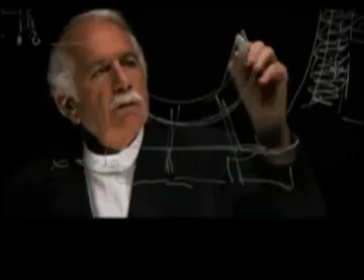We wanted to propose something new, something which does not exist today, neither in Singapore nor perhaps in the world.

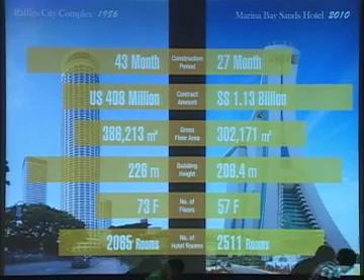Now this is a summary of the two buildings. The total floor area of Raffles City is about 386,000 square meters, while Marina Bay Sands is 300,000 square meters. Raffles City has 73 floors, but the per-floor height was rather short, so the total height is not that significantly high.

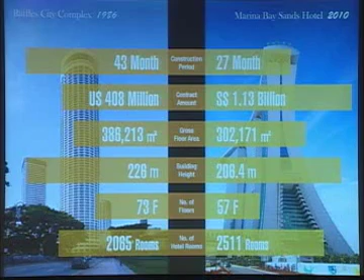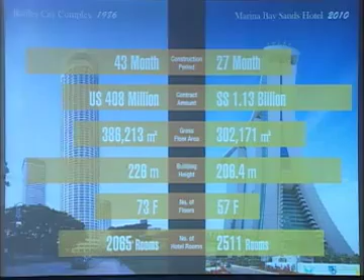But the two buildings have quite a number of rooms, over 2,000, nearly 2,500 rooms. It was really hard to complete the whole project. And on both projects, Ssangyong was the 100% sole contractor, so we were the only main contractor for those two projects. Now, you may ask how a 5-year-old young company got this mega project in Singapore in the early 80s. Our superstructure contract was in 1982.

I was lucky enough to have two great mentors. Since I have no engineering background, just a commercial background, I became CEO of the company as a young man, and these two mentors gave me all the good ideas on how to handle this mega project. One man, Mr. Kim, worked directly for the Saudi royal family when the first wave of construction came to Saudi Arabia. He taught me a lot about how to make a deal or break a deal. So I could handle this with a nice idea: having our own consultant back up our lack of engineering experience at that time.

The other man, whose name the Korean audience may be very familiar with, is Mr. Kim Soo-gun. Professor Kim is a really great man and great architect who loved concrete works, and his projects are all over Korea and overseas. He really gave me the essence of how to handle this mega concrete structure, and that was a really good help to me.

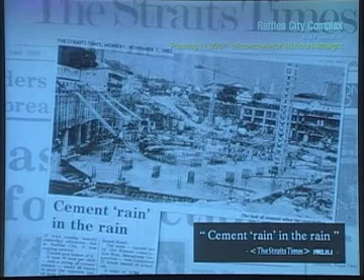Okay, the next one is for the stage of superstructure work. Eventually, we achieved a 3-day cycle per floor at the peak time. And in order to make this, steel bars were prefabricated on the ground, and we used a very advanced module table form system. I think it's one of the first times of using this huge quantity of table form system in the early 80s. We used 40 megapascal concrete. That was the highest strength in those days.

The most powerful concrete pump to pump up to over 220 meters vertically to the top of the building was also made and manufactured for the first time, and used in the job site. Maybe you are familiar with the good old name called Artemis, which was the most advanced, of course, in those days, critical path method planning software in the early 80s. We obtained that system. Of course, we had a lot of trials and errors, but finally we were satisfied.

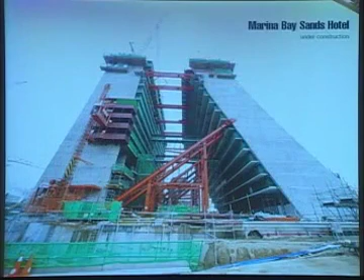Because of difficulties of construction within the extremely short period of time, it was very hard to make a deal. It was known as the most difficult project to construct in modern days. For example, there was a 52-degree leaning, using 40 millimeter rebars, post-tensioning duct running vertically, external bracing to support the sloping structure and the sky parks. The temporary supporting method was decided considering safety and the construction period after many failures of simulations.

During the execution, we installed the most advanced monitoring system for sensing even very minor movements of the sloping structure, because it was really the key to success, and safety was so much involved. Until we reached the 23rd floor, where the 2 faces meet each other at some point, it was really a nightmare every day. Well, luckily, nothing happened. We had to work 24 hours, 7 days a week.

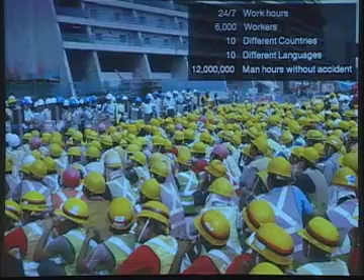At the peak time, we had 6,000 workers on a daily basis from 10 different countries using 10 different languages, at the same time at this small site. We are proud that we set a historical safety record of 12 million man-hours accident-free. And the total construction period from bottom to top was only 27 months.

Here is one episode. The day before the topping off ceremony, Moshe Safdie looked up at the structure from the ground, and he said, "Oh, this is fantastic. This is astonishing." I was so happy. Now, again, without cooperation between the three parties, client, architect, contractor, it would not have been possible to complete the project successfully within this short period.

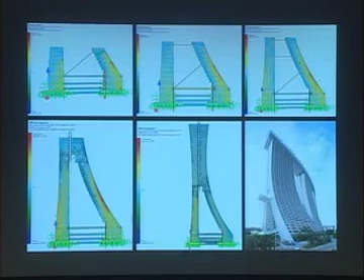Now, I'd like to humbly say something about what the CEO's role is for the construction company. For this extraordinary construction process, I had to suggest an extraordinary type of working relationship with my client, which was regular or sometimes emergency top management meetings, including me. Well, this is not exactly what my job has been, but this project was a super fast-track project.

Overall, during the construction period, I myself visited the job site 42 different times for solving critical problems such as progress delay, of course, sometimes quality of work, very important, and lack of resources in various fields. Singapore was in boom time in those days. Everything was lacking.

Let me give an example. Now, the project is delayed because of many unavoidable design changes, which we really don't like, but sometimes it's really unavoidable. However, many such changes happen in the super fast track. How to shorten the time? We really opened the book, and we had honest discussion among the three of us. How to increase workers while the local market suffers a lack of labor? That was a very serious problem.